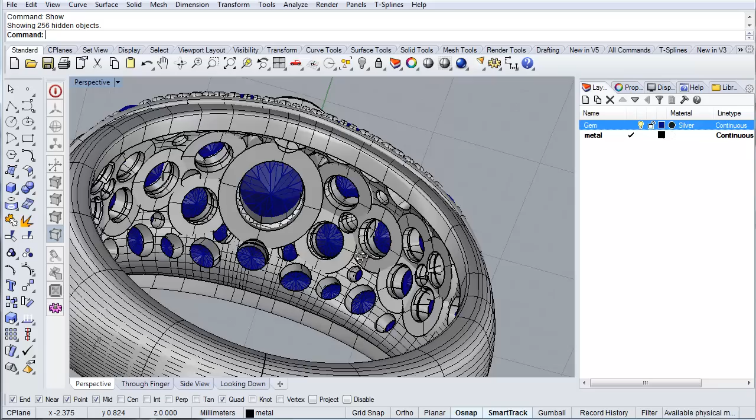Hey George, so a quick video again on 3D Coat and using it for a variety of reasons.

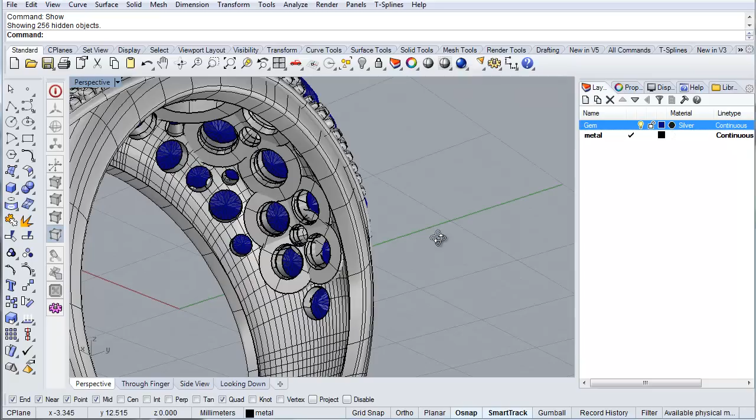This ring, when it was made, was going to be milled. I think there's probably a picture of it somewhere in 3D CAD. I drew one quadrant, then mirrored it, and mirrored again. I wasn't paying too much attention to what's happening underneath because it was all going to be burred out with a burr. So, sloppy modeling. Some people would call it optimum modeling because it didn't bother with the areas I wasn't going to reach with the milling machine anyway. Irrespective, what you have is bunches of overlapping geometry.

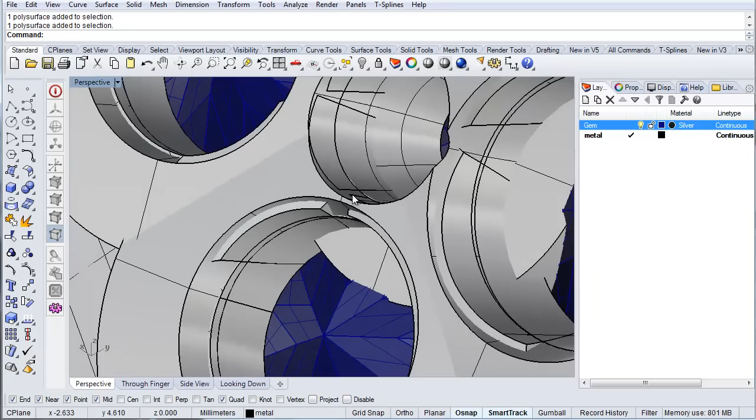When you try to boolean this, you're going to get boolean fails because there are concurrent planes and concurrent seams, and you're going to end up with bazillions of little naked edges. Any of the Rhino modelers watching this, looking inside here, are going 'oh my god,' busy freaking out even thinking about trying to mesh this out for a grower.

Alright, so what we're going to do is send this to 3D Coat to weld it all together. So you've got all these hundred thousand little bits and pieces, and we're just going to turn that off.

I'm going to grab them all. We're going to run an export. I'll leave this full tutorial for you. I've been using that name, temp for blend obj, for just about everything now. I'm going to go yes, and just go OK, and go OK.

Really what we're going to do is blend the whole thing together. So while that's waiting, we're going to fire up 3D Coat. Okay, and just close this off. File, import mesh for voxelizing.

Temp for blend, and this is quite a detailed piece. I think instead of 2 or 3 million polys, we need to come up to maybe 6 or 7 million polys. So start by scaling with 3000. Have a look, how much does that give us? 7 million polys. I keep telling you, 3000 is a pretty magical number.

I think that's probably going to be alright for us. I'm just going to go apply as is. Whoopsie, I'm just going to go apply, click yes, come on. Click yes and click on smooth just to bring us in there.

So what I'm going to do before I start blending is - this is quite mucky. If you wanted to have this grown, that over there is looking very, very messy. Alright, so I'm going to apply a symmetry plane to this so I don't have to work twice. I think that's over the x-axis, and I'm going to work on just the one half.

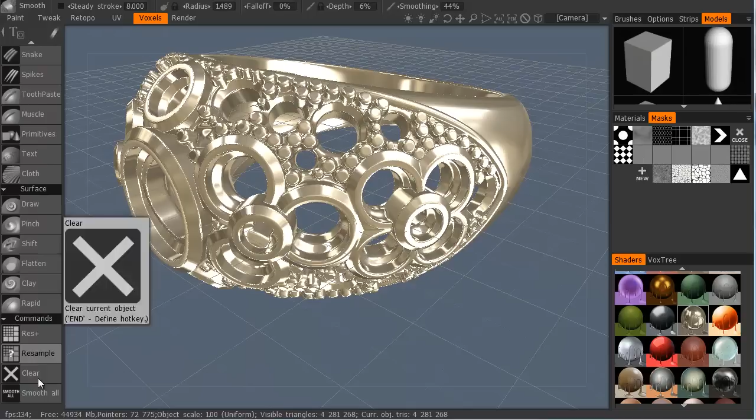I'm going to run down here, run it one smooth all. Let's have a look. What I like to do is just zoom in, make sure that I'm not overdoing it. Run another smooth all, and another one. I think probably that's going to be enough.

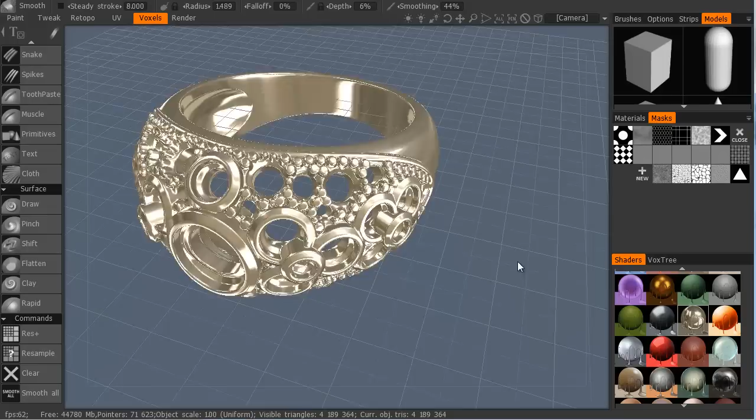Alright, and we're down to about 4 million polys. I think that's enough to bring back into Rhino for us. We don't have a poor man's computer, we got a nice one, so we can go for it.

So, file and export. Export the object to, I'm going to call it blended. Now if you were doing this at home and you were in Rhino 4, you want to bring that poly count down to about 2 million.

And you would do that here. You would decimate it by half. I'm going to export both. I'm going to export that at half, and we'll just have a look. It might make it a little crunchy.

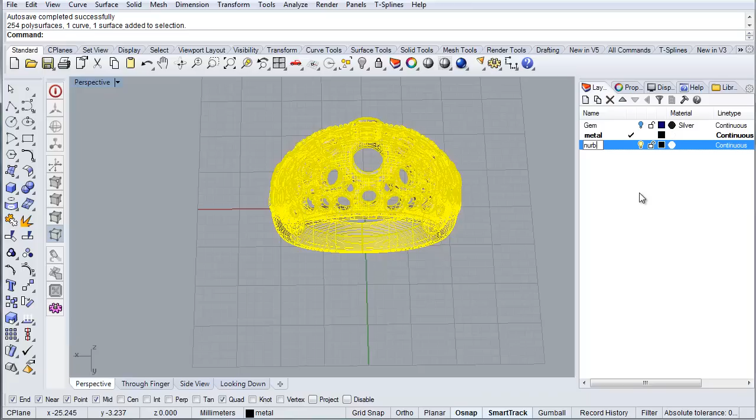2 million poly is around about good. I'm going to hide all of these, and I'll maybe create a new layer, NURBS, and copy all of the change object layer, and then turn that layer off. And then, have we finished importing, exporting?

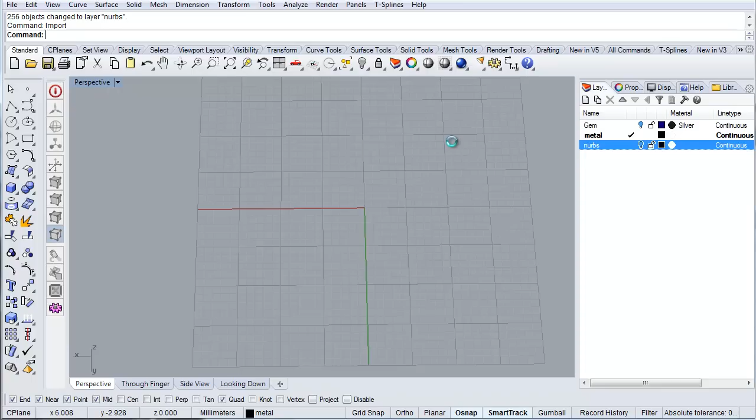Oopsie. Yeah, alright, so import our blended object. And be a little bit patient because you're going to be pulling in a big thing. Rhino is actually telling me not responding, but it will respond in a second.

Okay, so let's go have a look in here, and then I'll export the 4 million poly, and you can have a look. Basically what you can see here is you now have one object that's pretty much blended right around. It looks good. It's visually appealing in here, which means it's going to be visually appealing in the render.

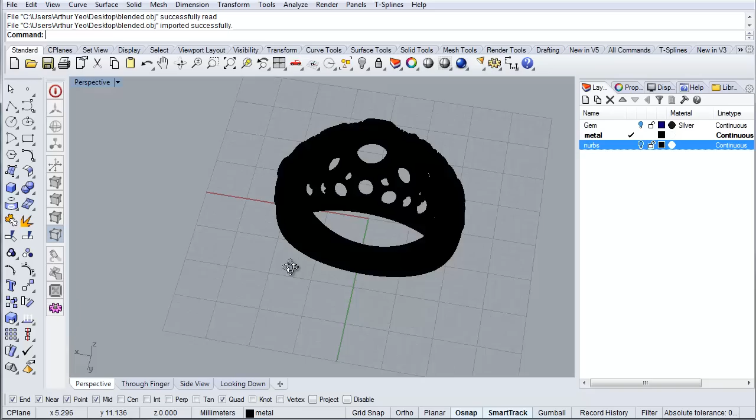So let's go to our rendered view. Okay, and that's looking pretty much alright. Let's turn our gems on.

I would say that you're now ready to take this job back into Matrix or carry on in V-Ray, whatever it is you want to do. And that piece is beautifully, beautifully finished. I'm going to just apply material to this.

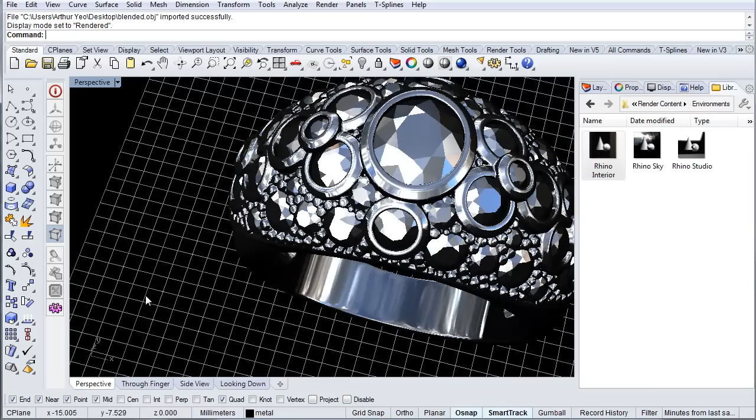We need probably a different environment. Rhino interior. No. Why is it selecting that the whole time? Not entirely sure why it's selecting that ring every time I try and change the environment, but okay, that's a Rhino glitch. Alright, but the actual part is beautiful.

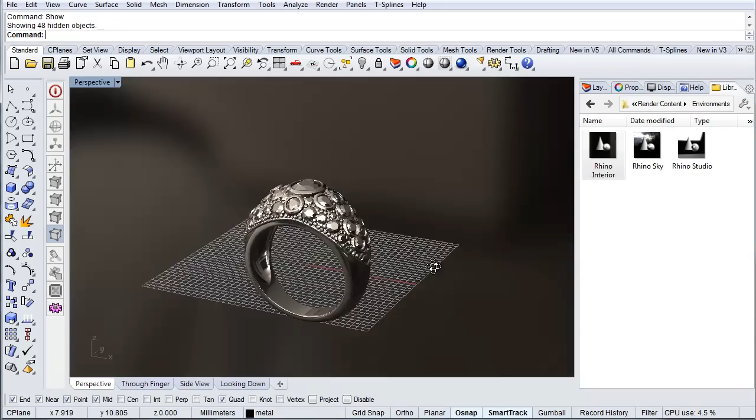It's ready to be worked. I'm going to hide all of that. This might just be a glitch in Rhino. Rhino interior, there we go. Let's show the part. For some reason, it keeps jumping onto that part. Ooh, Rhino interior looks even worse. Alright, quite yellowy. I'll do a render of that and we can have a bit of a play with it.

I'm going to pause this video while I do the render. Sorry, I just looked at the time, no time to do a render. Alright, I'll leave that mesh on the desktop for you to render, matey.

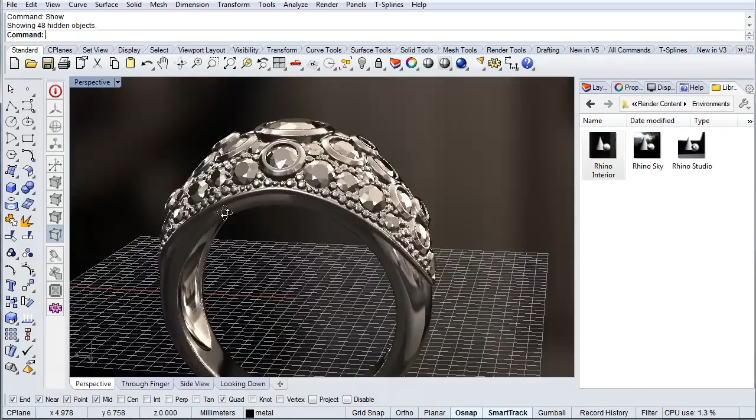As you can tell, no matter how we look at this ring, we now have a nice, beautifully blended piece. All the parts are together and it's one single mesh. All those little problems we had in there are all gone. All the blends are nicely blended together. The piece looks finished, which is quite important I think for the rendering that we're doing now.